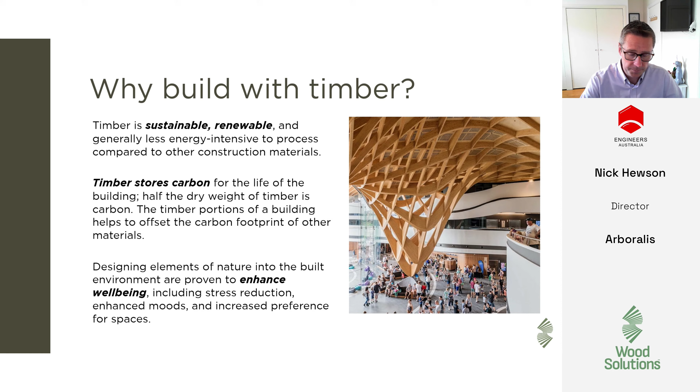So, what is MMC? I'm going to have to get through some definitions now, but the aim for the presentation today is to understand MMC and some of the broader typologies, how they apply to timber, get to know some of the key products and suppliers, understand where to find more info and how you as engineers can engage with it, and where to look if you want to integrate MMC into your projects.

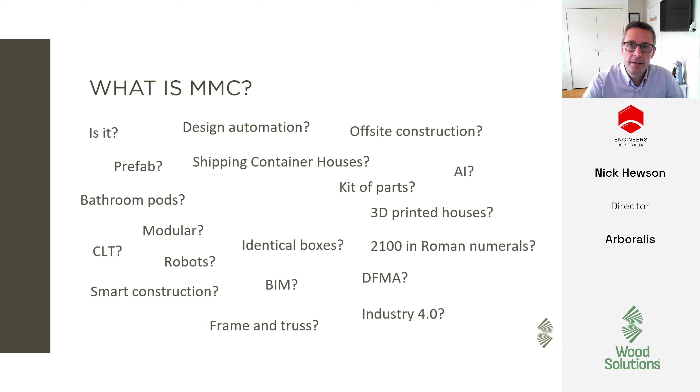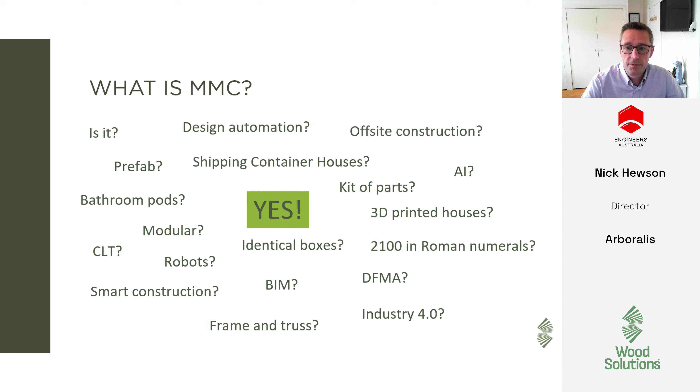So what is MMC? It's one of these terms that's unfortunately kind of both very vague at the same time as being—that's a kind of strength of it, I suppose, as well as a weakness. A lot of people use it to cover anything prefabricated and offsite—volumetric, shipping containers, all these things. But basically, MMC stands for Modern Methods of Construction. It's a bit of an umbrella term for a whole raft of different techniques of building, generally relating to a shift from doing more on site to factory controlled conditions.

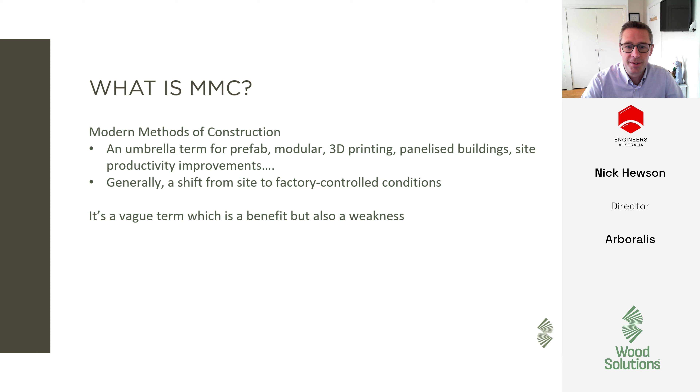So it sounds good. Politicians love to talk about MMC because it sounds like it aligns with their values and what they're trying to promote. It is a very broad term, but fundamentally I think it's about doing more with less—doing it faster, doing it with better quality, doing it with lower waste. It is very much a change in process and thinking.

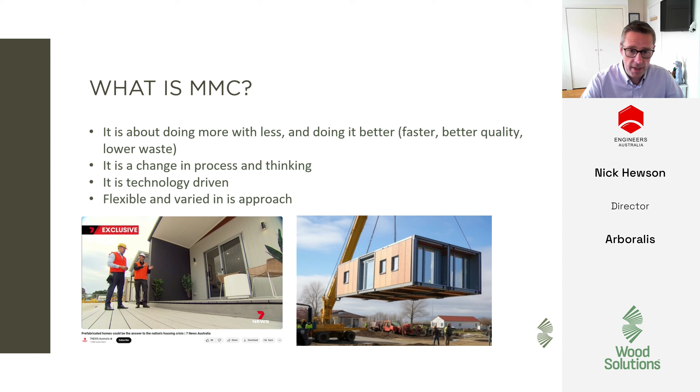This isn't a sort of business-as-usual approach to just building in a factory. It's heavily dependent on technology. There's a lot of pre-coordination that goes in now, particularly through your 3D models and through fabrication technologies in plants, and it's very variable. What it isn't—it doesn't just mean prefabrication.

If we were just to build things the way we do conventionally in a factory, it's going to result in some expensive buildings. So it's more than that—it's a process change, it's a thinking change. It's not going to suddenly solve the housing crisis and things tomorrow. It also doesn't stand still.

What's modern methods of construction today will be yesterday's construction tomorrow. So there's a constant need to keep evolving, keep iterating, keep building things better. It doesn't mean that we have to build every building like we do in a car plant with robots. It's about a kind of process as much as the machinery.

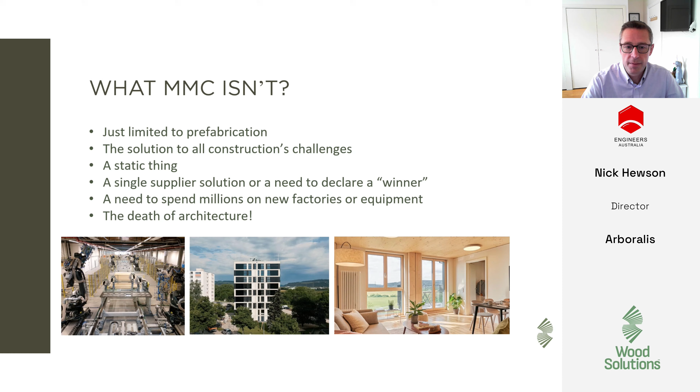So the machinery can be important. It can drive cost efficiencies and savings, but it isn't the end goal. The end goal is the building. How you get there and how you develop that, I think, is the really critical part to understand.

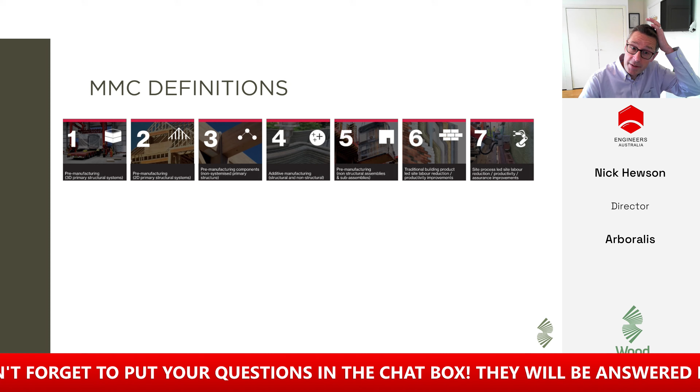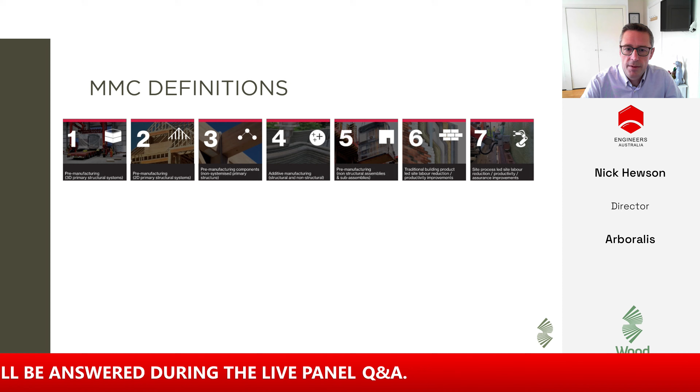So I wanted to take you through some definitions. This is what the UK government has provided. There's a really useful document out there—you can Google it, from the UK government, from a company called Cast Consultancy. They split MMC into 7 key disciplines.

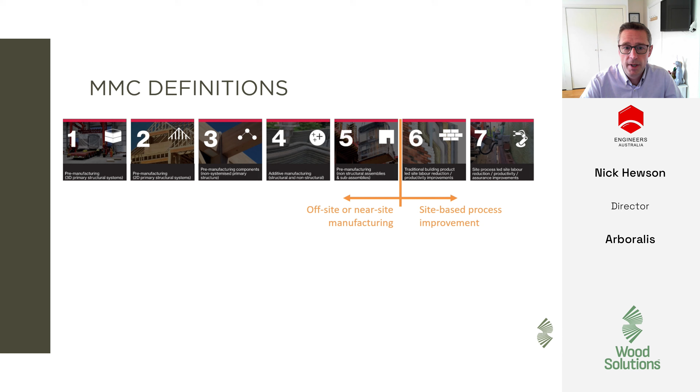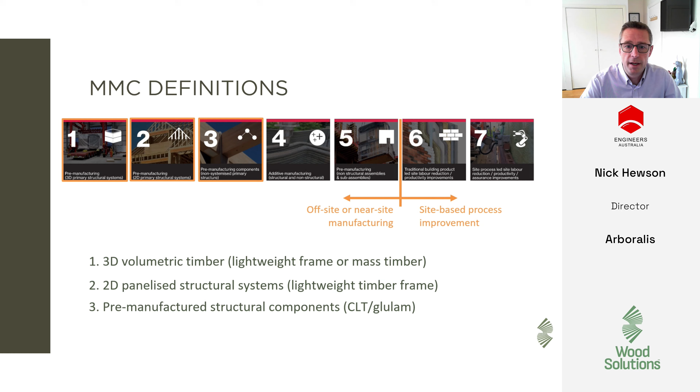Covering everything from off-site or near-site manufacturing to site-based improvement. They have 7 categories, but the most relevant ones to timber are number 1, which is what a lot of people think of when they talk of MMC—3D volumetric structures, so your fully finished units, shipping container type construction—panelized systems, and pre-manufactured structural assemblies.

I'm going to dig into each of these in a bit more detail now. As I said, remember these categories because we'll come back to them later. Category 1 is known as volumetric construction—you're transporting a full 3D unit of largely fully finished elements. So we're talking entire apartment units, all done in the factory, lifted to site, and put into position as a single unit.

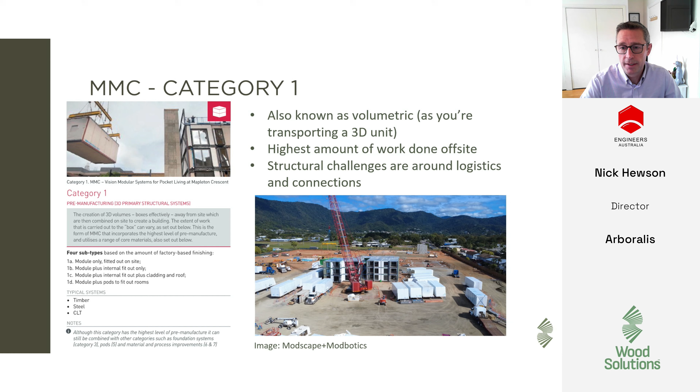So the most amount of off-site work is done in terms of finishes, fixtures, and fittings. Some of the biggest challenges are around logistics and connections. A lot of you will probably be familiar with things like bathroom pods, which fit into this category. Although there are no timber ones yet, I know one company is looking to develop those, so maybe we'll see those soon—but they're traditionally steel frame and GRC based. They can be integrated into larger timber modules though.

This is an image from Modscape and Modbotics, who you'll see referenced quite a lot in this presentation. They're really the premier volumetric timber manufacturer in the country.

So pros of this approach: you take a lot of work off-site, very, very fast to install. If you're really looking for something that needs to get installed quickly, then this is a very strong option.

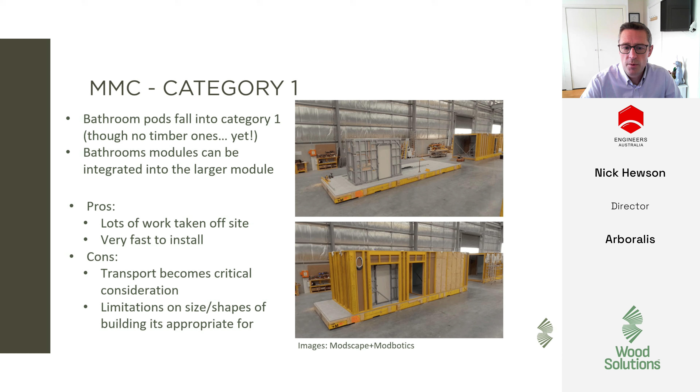Some of the disadvantages are the transport and logistics start to become very critical, and you are kind of limited on the size and shapes of buildings that this is appropriate for.

Moving on to what they term category 2, which is pre-manufactured 2D elements. So this is what we call panelized or kit of parts construction. For timber, there are different degrees of complexity with this.

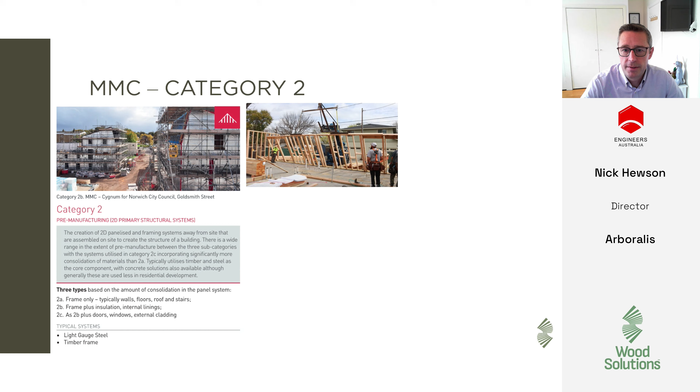You can start with everything from an open pre-nailed wall frame, which we use to build vast numbers of houses all around the country. And then you can start to add further components to that. It could be windows, could be linings to one side. It could be starting to put insulation and things inside, up to fully completed frames which are clad both sides, have doors, windows, electrical conduits and things installed.

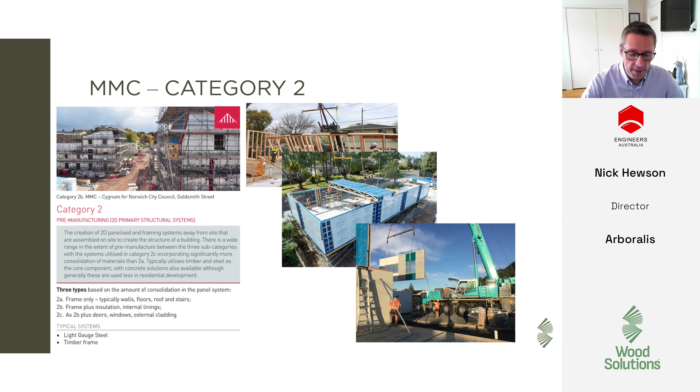So there's a great array of sophistication across what's possible with this, and all these products and systems are available in Australia. As I said, the pre-made wall frames and roof trusses and floor trusses are all very common.

The 3 kind of main nail plate companies that we'll see a little bit more about later. But there are 250 frame and truss manufacturers around the country that can do this sort of thing day in, day out, and are very, very good.

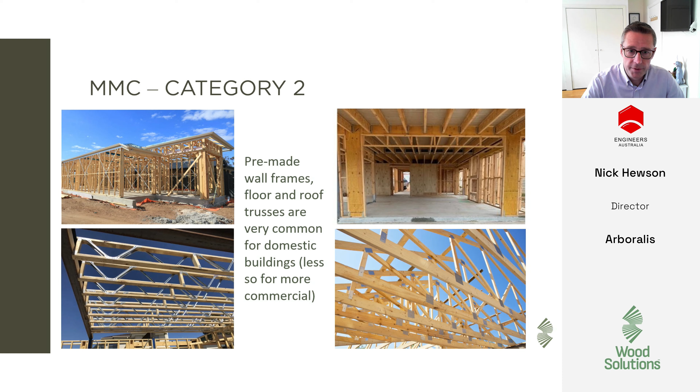So when we're talking modern methods of construction, we've been making these frames this way for 40 to 50 years and doing it very successfully. So there's a very strong supply chain out there already capable of doing this, and we can look to leverage them through higher levels of prefabrication.

So what we're starting to see now is a trend towards certain suppliers offering more than just open frames. They're starting to turn floor trusses into cassettes. They're starting to make prefabricated stairs, even lift shafts, and wall panels.

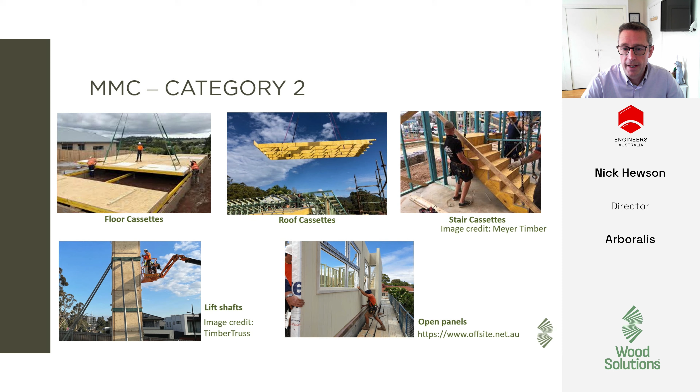We're taking more of that work off site, doing it in the factory where it's heavily controlled, where it can be carefully detailed and built, so you're not at risk of weather, you're not at risk of quality issues on site. This is certainly an opening area of the market that is really starting to develop.

Some of the advantages of category 2: it is very flexible. It can be applied to any building typology. We build a lot of timber frame houses in this country. We could be building more schools, more small apartments, buildings like that. It is very able to be prefabricated. Start again.

Some of the advantages of this category: it is a very flexible system. We can use different degrees of prefabrication from open frames through to fully closed walls, so that can be chosen to suit the project. It can be very cost effective. We are using the timber very effectively in a timber frame wall, for example. There's no real structure in there that doesn't need to be in there, so it is a very efficient form.

Some of the disadvantages are that the suppliers tend to be a little bit on the smaller side and more independent. There are 250 odd frame and truss suppliers around the country, from small up to very large, but it can be hard to find the right one for the scale sometimes in the area where you are, and I'll show you more information on where to find that later.

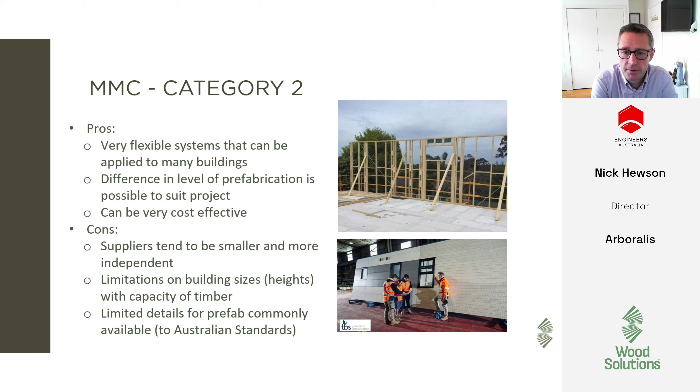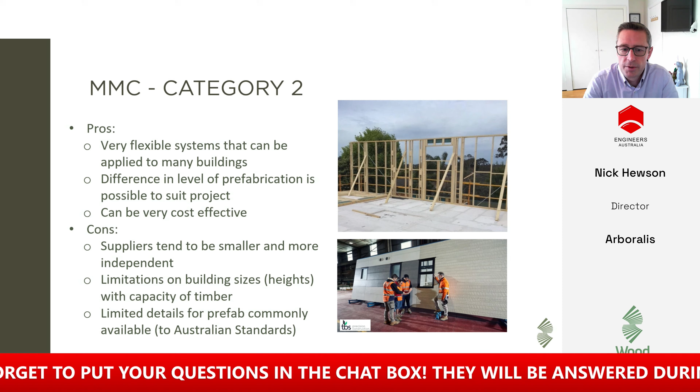We do have limits on building height and sizes that you can achieve with timber, just due to the pure capacity. But certainly, anything up to 4 or 5 stories for apartments should be very feasible in timber frame. And when you get into heavier areas of prefab, more finishes and things go on, so it is more challenging to find details and connections that will work for those, and that's where you need to work closely with suppliers, which we'll talk to later.

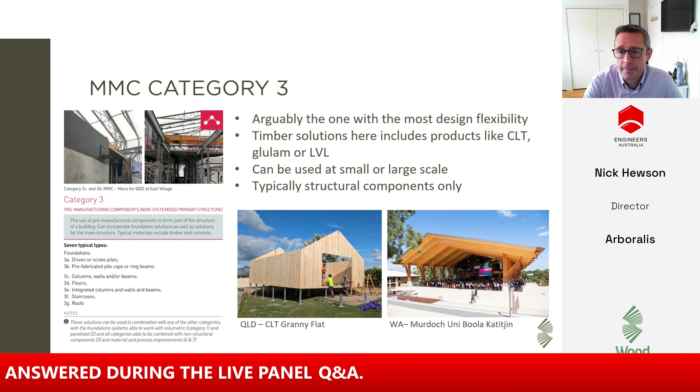Move on to category 3. This is arguably the one with the most design flexibility. For those of you who aren't aware, these are the 3 kind of main types of structural mass timber.

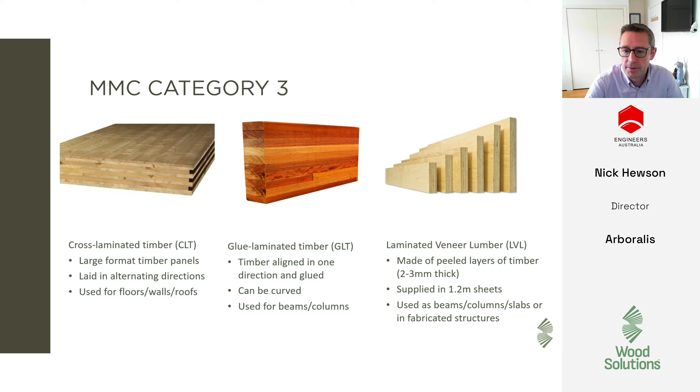Cross-laminated timber, which is your walls and floors, planks laid in alternating 90-degree layers. Glue laminated timber, where we lay the sticks of timber along the length, used for beams and columns. And then laminated veneer lumber, or LVL, which is a peeled product, can be used for a variety of things, from beams, columns, or slabs. So all of those sort of make up the mass timber family.

But this category, as I said, can be very variable. We can use it to build office buildings, with glue lam posts and beams and CLT slabs. We use it for multi-residential buildings.

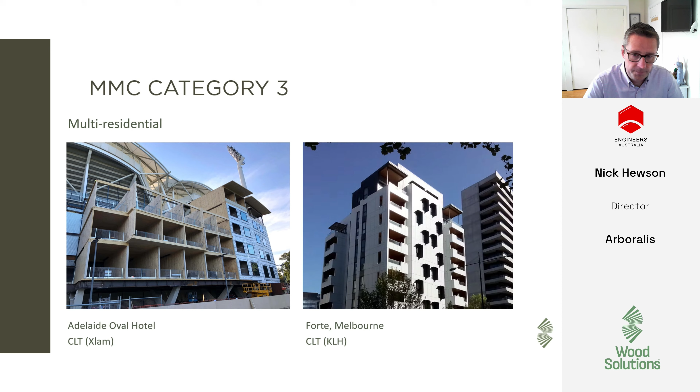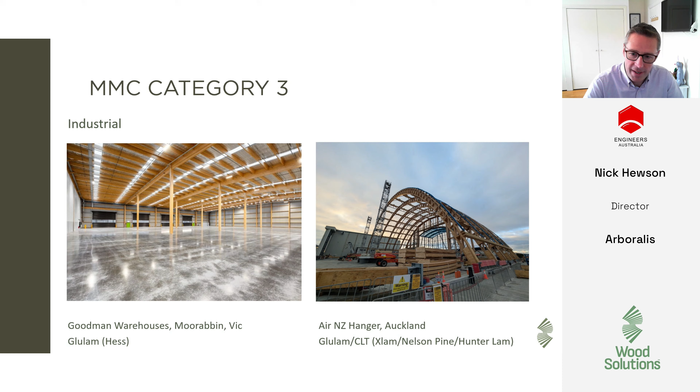We can use it for industrial buildings. The other one on the bottom right isn't technically in Australia, but it is a really cool one. It's a 100-meter spanning glulam, LVL, and CLT arch in Auckland. If anyone wants to look at that one, it's called the Air New Zealand Hangar, a really fascinating project.

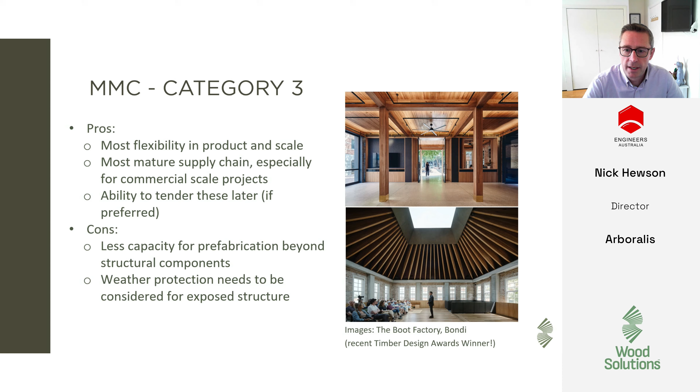Some of the pros of this: a lot of flexibility in products and scales, the largest and most mature supply chain, especially for commercial scale projects, and probably the most alignment in terms of different products. Materials are similar enough that you can potentially tender these later in the process if needed. Some disadvantages: less capacity for prefab beyond the structural components, and you need to be careful around weather protection, particularly for larger structures.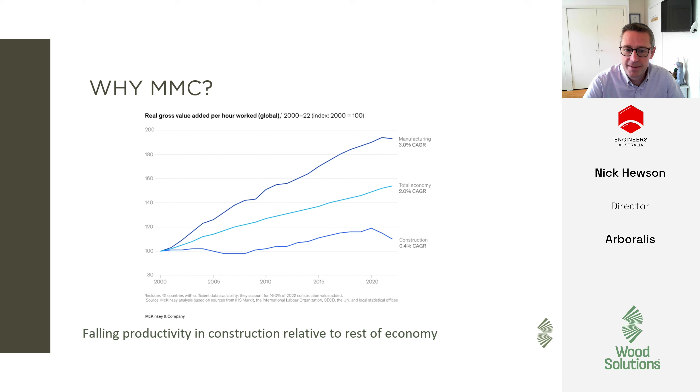When we look at construction relative to other industries, there's been a significant drop, or it's barely changed in productivity over the previous decades compared to other industries. A lot of that, I think, is because we still insist on building prototype buildings which are never repeated, with details that are never repeated, and we seem determined to design these from scratch every time. So I think we see MMC as an opportunity to find some efficiency in construction.

Another aspect is that we're also losing trades. We don't have enough trades to do the sort of buildings we want to do at the moment. If anyone's read a newspaper in the last few years, you'll know there are shortfalls in a lot of different on-site trades. But we see MMC as a possibility, a way of finding more secure employment, nicer working conditions, and taking that work away from building sites to put it in factories.

I'm going to shoot through this quickly. I left this QR code up on the screen - I've created my own little Google map where I've tried to map some of the major players in the timber MMC space around the country. Feel free to take a look, and if you've got any feedback or companies I'm missing, please let me know. I don't think I've picked them all up by any means.

We're starting to see these companies grow up, offering different services across the country. I'm going to flick through some of these now. I asked a lot of the suppliers I could think of to send me a quick slide showing what they do and some of the services they offer.

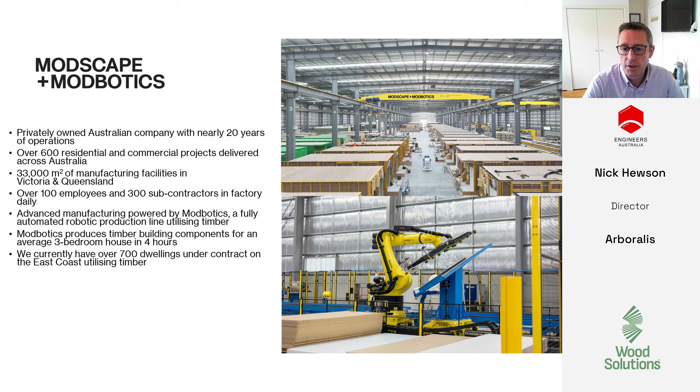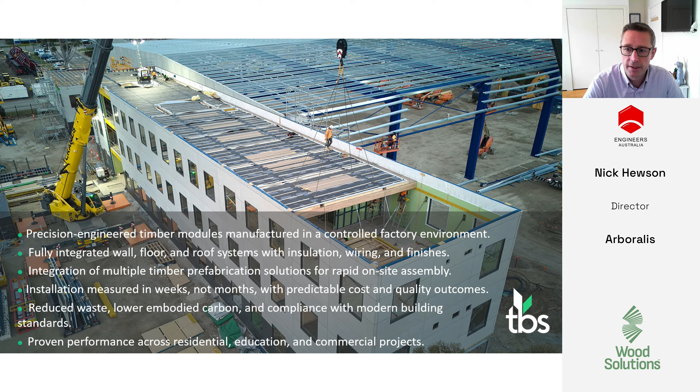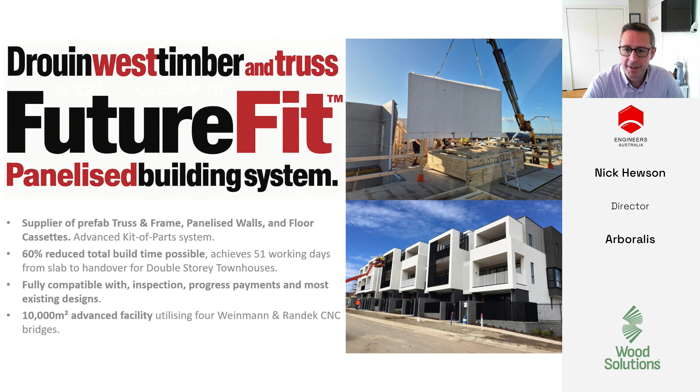Drouin West FutureFit is another panelized building system, again in Victoria. I don't know why all these seem to be in Victoria, but a lot of them are certainly based here, doing a lot of townhouses, again with pre-clad walls.

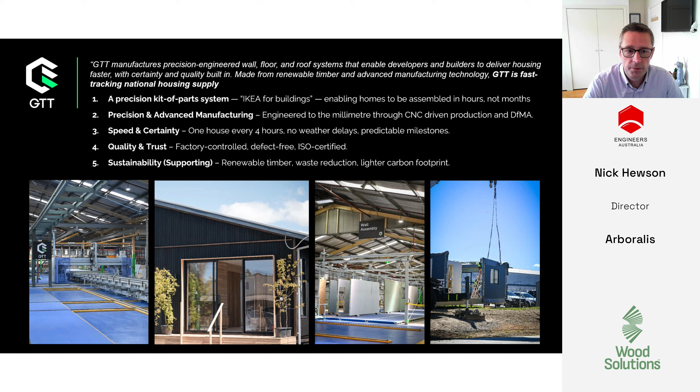GTT, or Green Timber Technology, based up in Orange. I've been working closely with these guys the last couple of years, who are just up and running now and starting to deliver their first projects. Sort of panelized walls, floors, roofs, all built out of timber frame on a fully automated line.

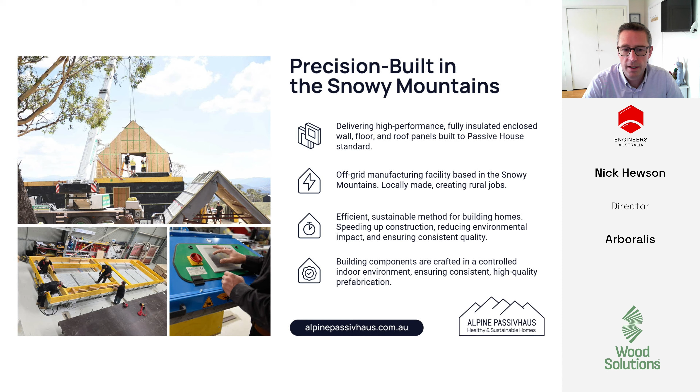There's a lot of these sort of guys around. I met these guys last week at a conference, and they asked me to include them in here. A lot of kind of passive house, smaller timber frame providers servicing that niche market here, again with high levels of prefabrication quality.

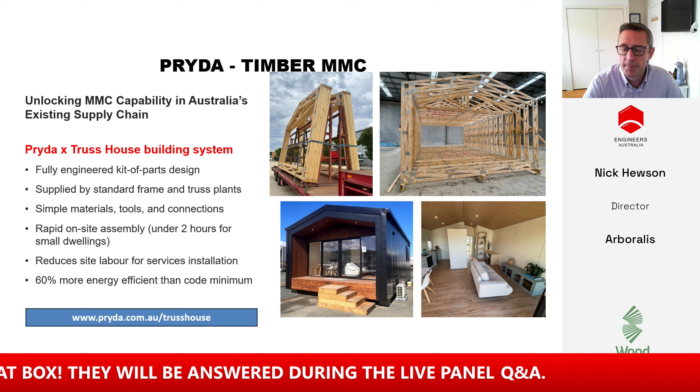Pryda, who are probably known to many of you who work in the domestic space, have a lot of innovation coming in. There's this truss house system, new to the market here, utilizing that frame and truss manufacturer, but making full buildings out of it, from walls to floors, creating portal structures, which is opening up possibilities for new building typologies that timber currently struggles with. So there's some really exciting innovation coming out of those companies.

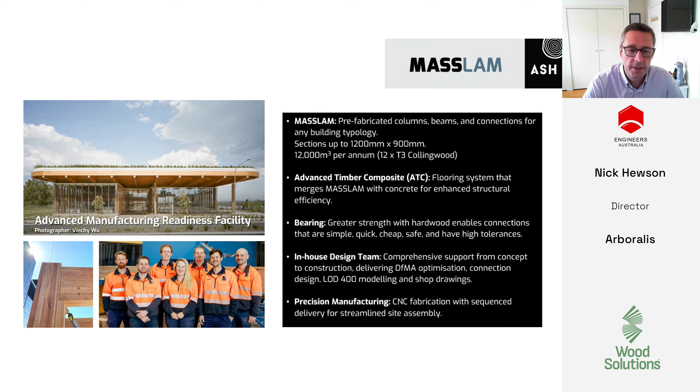Getting on to the mass timber guys, Masslam, who are based in East Gippsland, are arguably the country's premier mass timber provider in terms of glulam, at least. They produce some beautiful material and have worked on a number of large scale projects across the country.

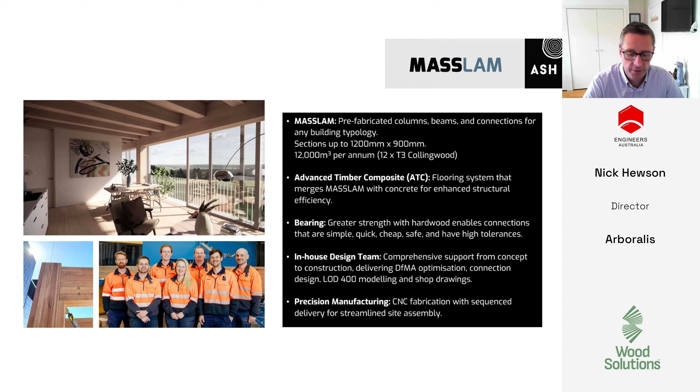Next, Timberlink, who have opened up in Mount Gambier, providing CLT and glulam, and are starting to deliver projects into the Australian market in the last 12 months.

Xlam, one of my old employers, the first CLT producer in Australia. They offer design and supply of a range of CLT and glulam products, and have done over 1,000 projects, so a lot of you will be very familiar with them. A very capable company, and they're starting to develop ranges of more commodity products aimed at that smaller scale domestic market, which is really exciting to see.

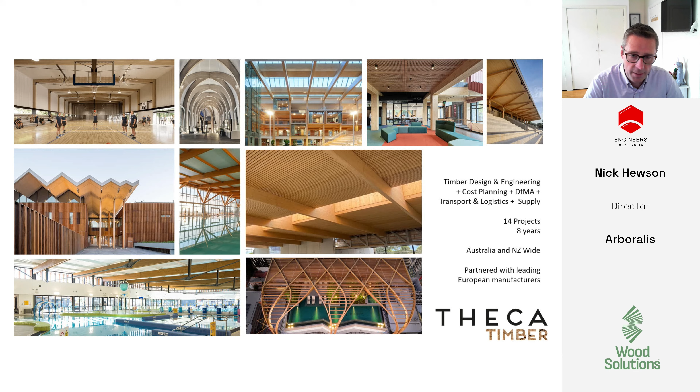THECA Timber, another one that's got a track record across the country of glulam projects. KLH, one of the Austrian pioneers of CLT, who have a subsidiary based in Canberra, and they're delivering commercial projects, schools, passive houses, things like that. They have a degree of prefabrication that they can do in their factory in Canberra.

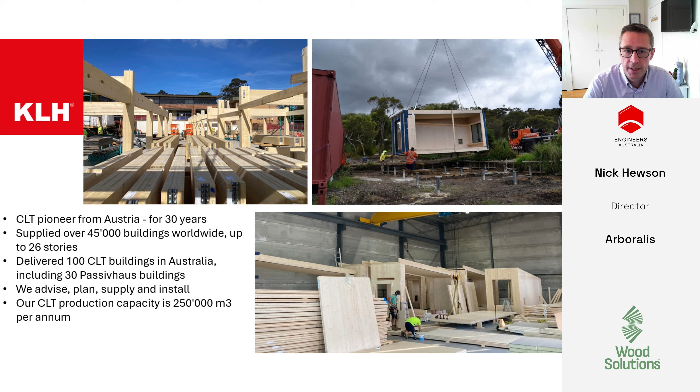Some of the overseas ones, so Techlam over in New Zealand, again producing some incredible materials and a high degree of automation in their factory. And there are so many others that I either haven't got slides for, or that I just can't spend the rest of the discussion going through all of them. But there are so many out there that offer different services, and I welcome you to reach out to those people and look at that map that I gave earlier. If you want to get in touch with any of them, they're only more than happy to talk about their services.

Just wanted to run through a few of these, the three different categories of MMC. You'll notice that all these are accommodation buildings, all kind of multi-residential buildings. And that's on purpose, because I want to show how these different categories can fit into that, because I think that's a really key market for timber and MMC.

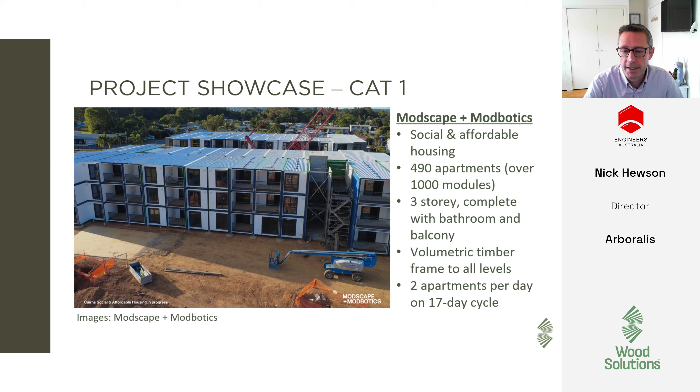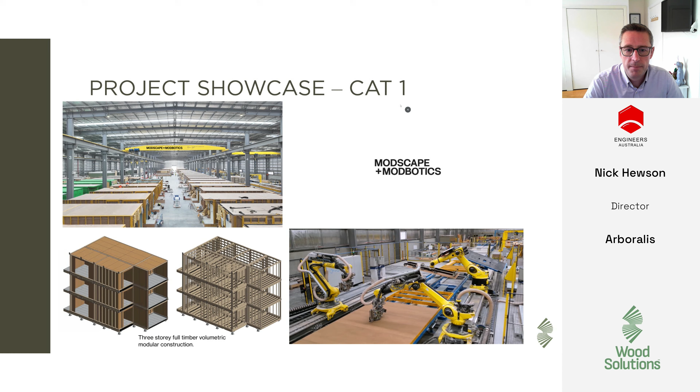Modscape and Modbotics are doing some incredible things with timber. This is an apartment project they're doing in Cairns - 490 apartments here across a whole number of buildings, up to 3 stories, supplied complete to site with bathrooms, balconies, everything installed. They're producing 2 of these apartments every day using their automated robot line to create the walls, then turning those into volumetric modules complete with bathrooms and fixtures and fittings installed.

Timber building systems in that sort of Cat 2 panelized system. They've been doing a whole raft of projects for Henley Homes, prefabricating townhouses with prefab floors, walls, and roofs. Again, very, very fast, very quick, simple to install. They've done hundreds of these now, and brought some real innovation in.

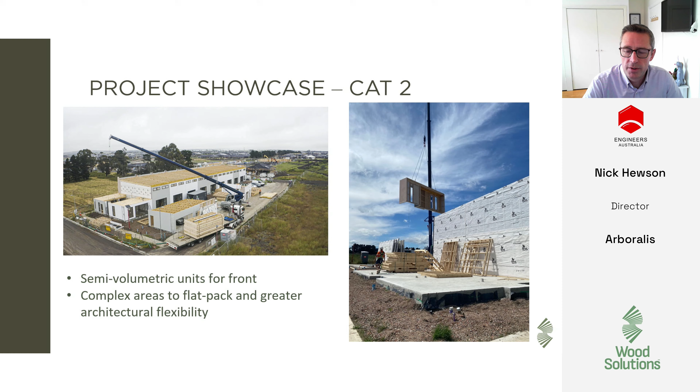They've got a semi volumetric unit for the front of the building, which gives you some flexibility to vary facades and to deal with some of those complicated areas that are difficult to flat pack in a more traditional sense. By expanding those fronts into a meter wide strip, they can deal with a lot of the complexity that comes with those areas and do that in the factory. This has been a really successful project.

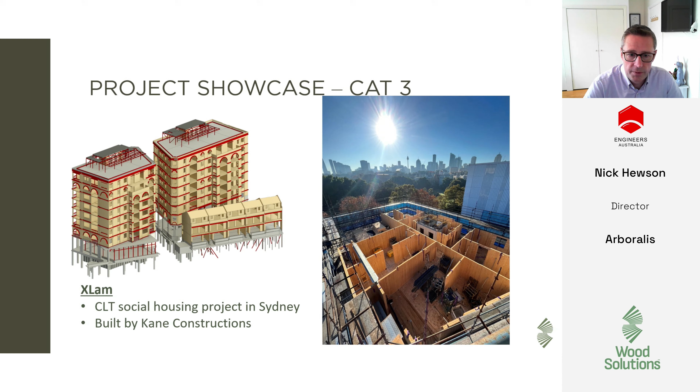Getting a bit taller in scale, once we get over 4 to 5 stories, we start to have to move from traditional lightweight timber frame into more mass timber. This is a project that Xlam have done recently in Sydney, built by Kane Constructions - social and affordable housing built using load-bearing CLT.

Ultimately, it's all clad in brick, which seems a little bit counterintuitive to me, but that's the market in the area. It even had a visit from the King earlier in the year. So this one was a pretty high-profile project done recently.

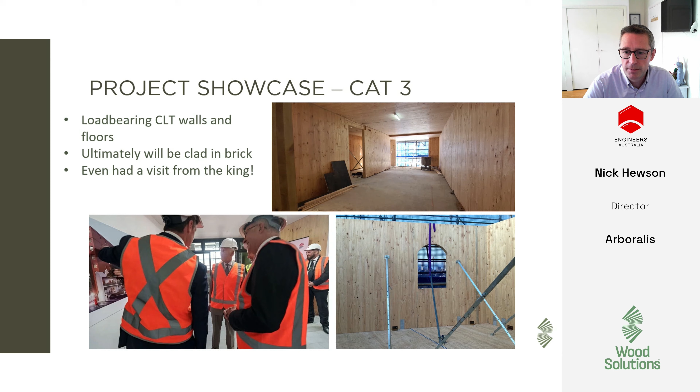So all those three examples show different ways that you can achieve apartment buildings and multi-residential in timber frame using different systems.

So I've given you an idea now of the different systems involved. So what does it mean for engineers? How do you engage with the process? Why choose it in the first place?

For me, why you'd want to choose timber in an MMC solution is the reduced embodied carbon of the timber - a lot of clients are certainly asking for that approach these days - and the speed of construction on site, being able to get these buildings up, get tenants in, get return on them, reduce holding costs.

That's obviously really critical. Where you have limited labour on site to build more conventionally, again, it's massive. The aesthetics, that biophilic nature is also really important for timber buildings, as well as the fact it's just very lightweight, so you can make savings in foundations and transfers and supporting structure.

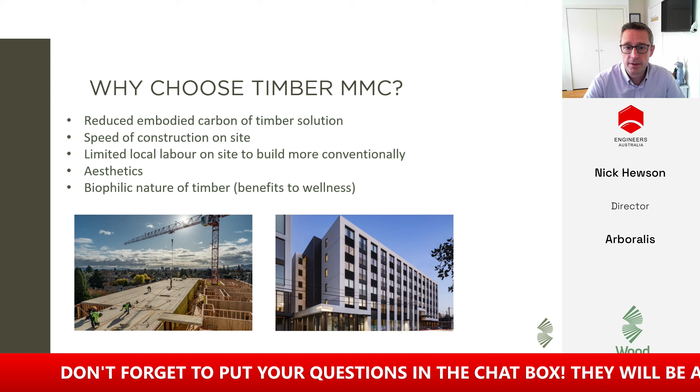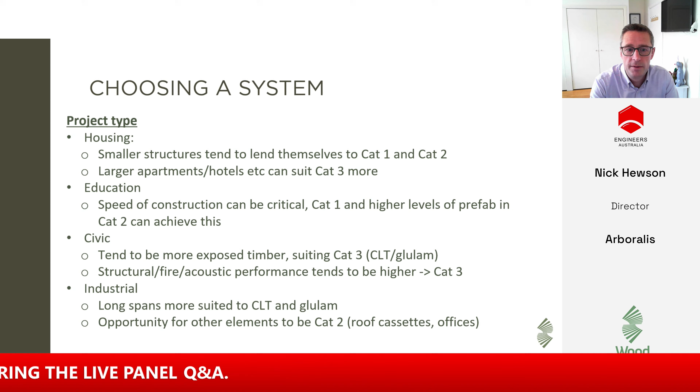So if you're advising a client at the start, if they're interested or you'd want to kind of promote a timber, an MMC response to it, some of the questions you want to ask yourself: what type of project is it?

If it's a smaller structure for housing, it tends to lend itself more to the volumetric or panelized systems. Once you get above a certain height, my gut feel is usually about 5 stories, the mass timber options start to become much more cost effective and essential just to deal with the load.

If you're looking at school buildings or university buildings, that speed of construction can be really critical. If you're building new classrooms, getting those units on site fast in holidays, reducing disruption to students can be really important. Those volumetric and panelized systems can really help to achieve that and speed things up.

Civic buildings, the larger government ones, tend to be a lot more exposed timber - they want to celebrate things a bit more. So I'm seeing those more in the CLT and glulam area, with more structural, fire and acoustic performance requirements. It tends to be that the larger, more solid sections of timber are more suitable there.

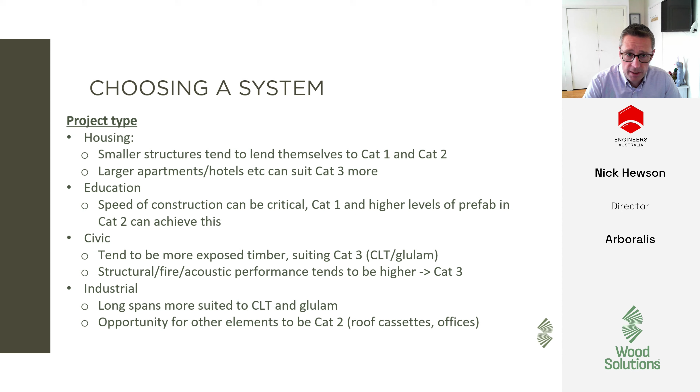Other buildings like industrial, long span, tend to be suited to more CLT and glulam, but there certainly is opportunity for other systems, particularly panelized elements for roofs, walls or offices, to be integrated as well. Not to say any of these are hard and fast rules, but just more questions to ask yourself at the start.

Obviously the project location is really critical - local labour, what trades are there beyond structure, carpentry, how is it installed? Transport - where are the factories relative to the site? As you can imagine, transporting fully volumetric modules, you're paying to ship a lot of air.

So those sorts of projects can tend to have a large component of their cost be understanding that when you're working out which options to use.

Also that site access element - those volumetric modules can get pretty heavy, so if you need a large crane, is the site going to support that? Can you get the units there? That can be a really critical one as well.

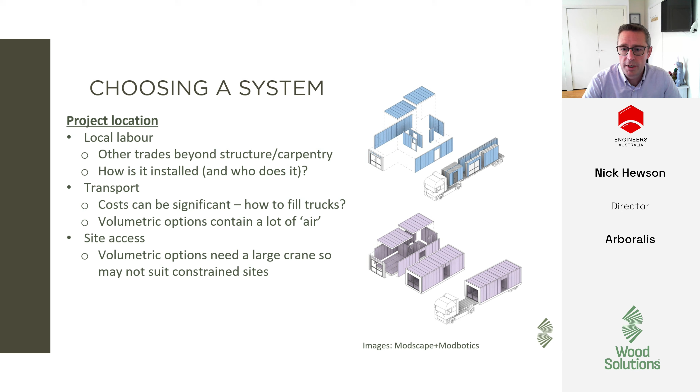So sometimes using smaller components to fit into more dense urban infill sites can be an important way to go. One thing I see a lot of is we need to understand those manufacturing constraints - what sizes are available, whether that's CLT, glulam, or timber frame.

If you're designing things that sit outside that, you can get inefficient very quickly. I've put some specific ones up there - every manufacturer is slightly different, but there are some common themes. Wall frames are typically 8 to 10 meters, up to about 3 to 3.2 meters high. That tends to be the sweet spot.

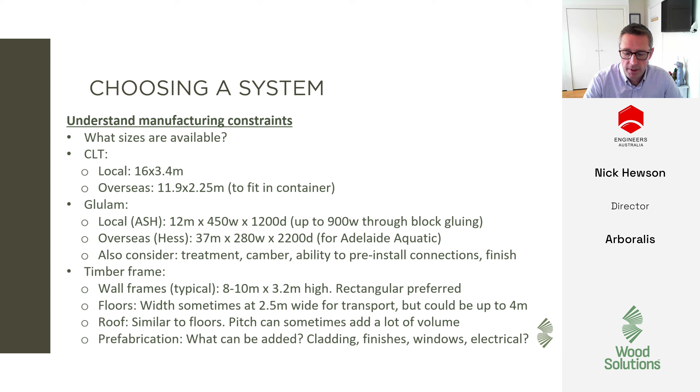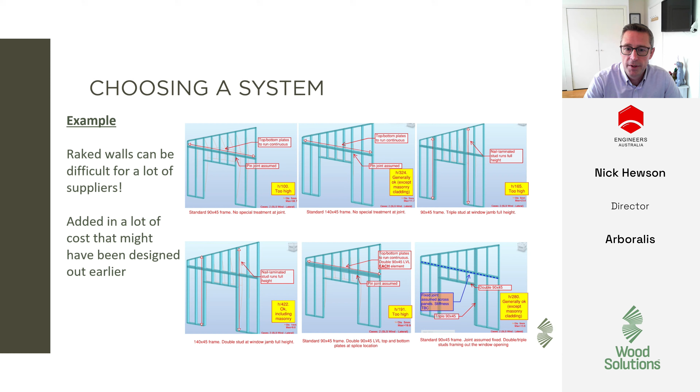If I show an example, it's actually quite hard to make a raked wall. If you're doing that on an automated line, they're generally built to do something in a rectangle. This was an example for a client where they were using a prefab system, but they had a raked ceiling and a wall panel that got very tall. So we were trying to work out how to make that automated. It added a lot of cost in the end - there's extra structure, extra wind beams and things that need to be integrated. That could have been designed out a lot earlier and saved a lot of cost if the building had been tuned around the particular constraints of those systems.

So turning your project into a timber-based system, I think some of the key things for structure - making sure things are aligned. Timber doesn't deal very well with transfers, so if you're constantly stepping around wall lines or structural lines, that's going to add cost and become not very cost effective quickly. Buildings need a lot of alignment between levels - it's not to say you can't have a podium structure built more conventionally with timber above, but doing a lot of transfers is challenging.

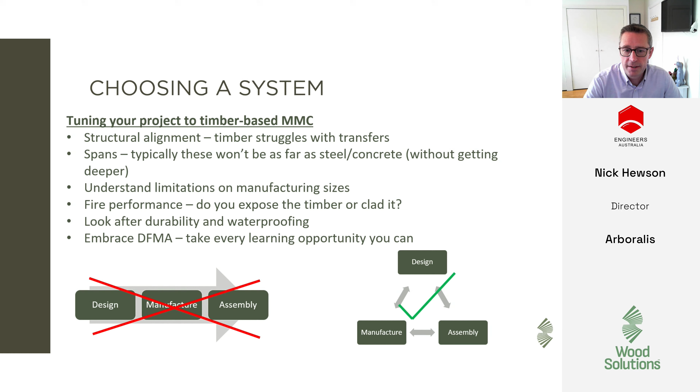Structural spans are obviously a little less than they will be with steel or concrete. Understanding those limitations on the manufacturing size. Fire performance, particularly as you get into larger commercial buildings - do you expose the timber, do you have to clad it? Something I'm really passionate about is DFMA, Design for Manufacture and Assembly - taking every opportunity to learn that you can, getting out to manufacturers, getting out to sites, speaking to people, and trying to turn it from a linear process into one where everyone's comfortable feeding things back to each other and learning.

When we're talking about structural design, I think we need to focus on sizing of the elements, picking the lowest common denominator for the materials - important. It's no sense designing for a really high grade glulam if only one supplier in the country can offer that. Particularly at that early stage, it's often better to pick the lowest one and make sure the design suits that, so you get the most market coverage. Don't forget the fire design, which can often govern member design and connections - so make sure you've got enough timber fiber in for that.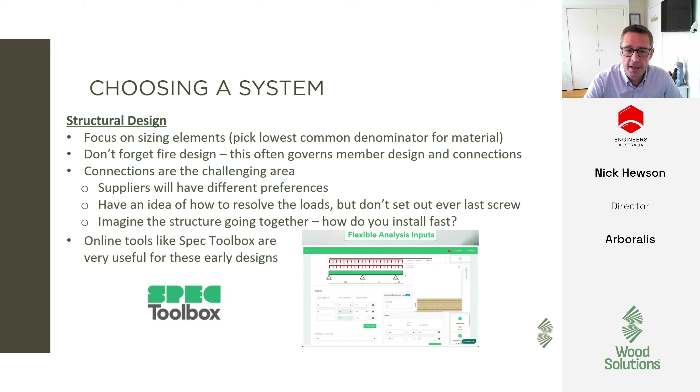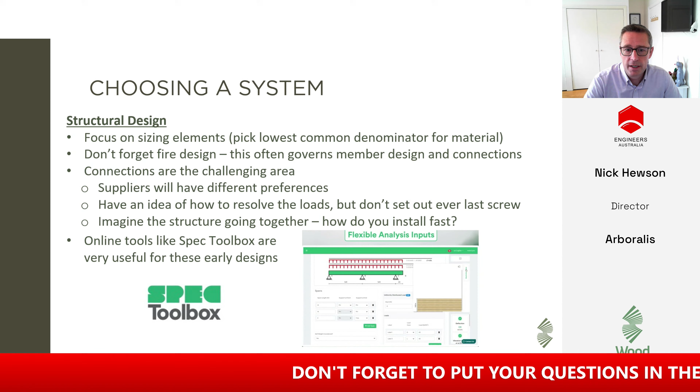The connections are the most challenging area. Every supplier has a different way of doing things, so you need to have an idea of how the thing goes together and some ideas of connections. Imagine how it goes together - how are you going to do this quickly? You don't want to design every last screw, because the supplier is going to have their own input into that - they're going to want to control that element. So make sure you're aware of what the supplier does, what their offerings are.

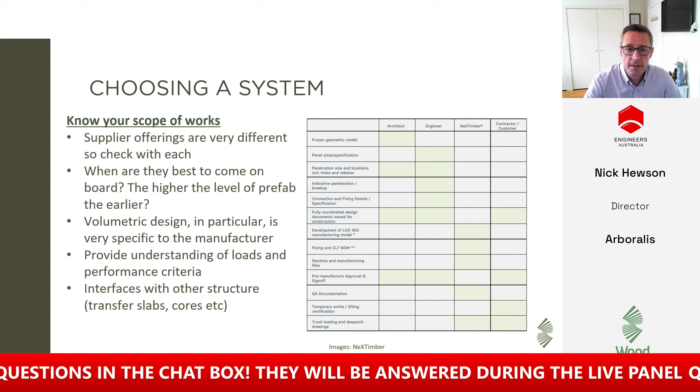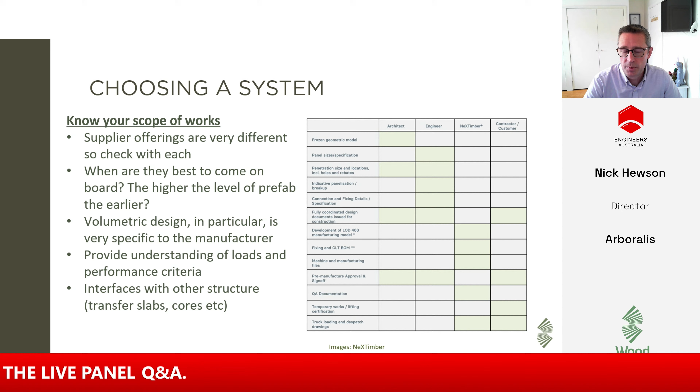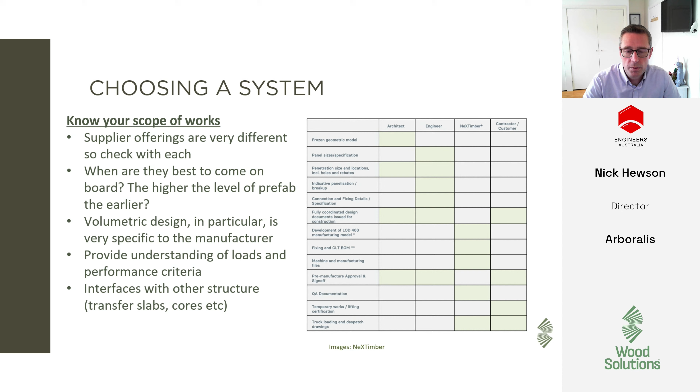There are different ways of doing things, and some suppliers will offer all sorts of engineering support and detailing, and others just want to supply the product. So it's important to understand that earlier when you're choosing - when they come on board is often important. The higher the level of prefabrication that you're dealing with, beyond the structure - if you're dealing with all the facade elements, glazing, putting a lot of finishes on, then you probably want the supplier on board earlier. Volumetric in particular, they will do a lot of that stuff themselves in-house. So as the engineer, you're trying to understand the interfaces with other structure, whether that's transfer slabs, cores, and provide them with the loads and performance criteria to be able to do what they do.

Understanding what you need to document, and conversely what not to document, is one of the biggest challenges in this area - knowing how far to take your design. Do you design it to the nth degree and risk having a lot of that undone later when a supplier comes on board and needs to change it to suit their system? But you also can't keep it so generic that they're unable to price it or detail it. So understanding where you pitch that level of design, documentation and resolution is really important.

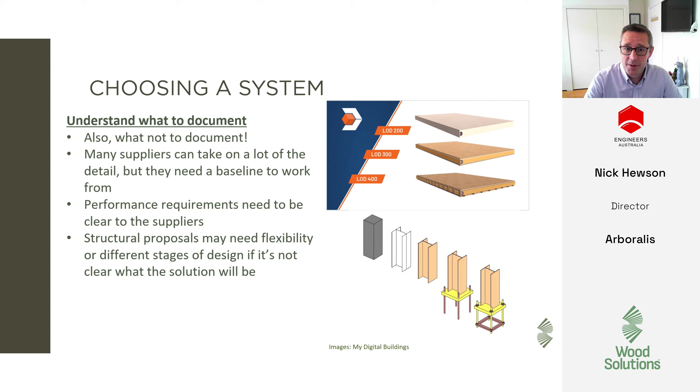Making sure those performance requirements are clear to the suppliers gives them the ability to look at different ways of doing things and connecting things. That's probably going to need some flexibility in your proposals if you're not sure what sort of solution you'll end up with - flexibility to deal with the different ways of doing it and delivering it. You don't want to do too much and don't want to do too little. It's that kind of Goldilocks effect.

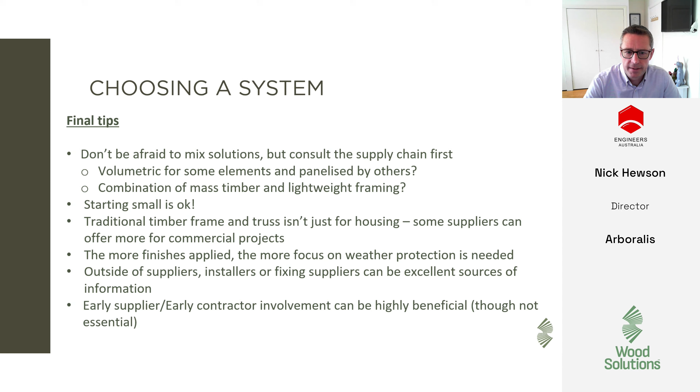Just starting to summarize, and I realize I've gone nearly the entire way through the presentation without addressing the elephant in the room: is it any cheaper? It's a cop-out answer, but it depends. If you're looking at bespoke one-off designs for MMC, it's probably not cheaper. That doesn't mean you don't need to do them - there may be other benefits with speed of construction, reduced disruption, or quality. But if we're designing these one-off buildings, it's unlikely to generate lots of savings.

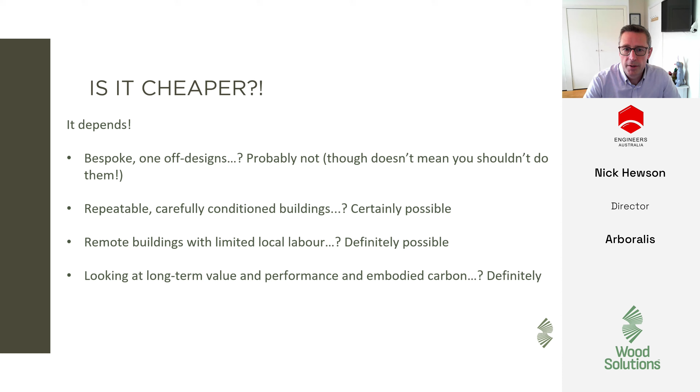The more repeatable projects are, the more carefully conditioned, the more we pay attention to those manufacturing constraints up front and design around those - designing it so that it could be timber, not that it has to be - that certainly starts to become more possible. As we go into more remote buildings with more limited local labour, I think this equation only starts to tip more and more in favour of MMC and timber. Clients looking at long-term value, embodied carbon, and the build-to-rent space are looking very heavily at these sorts of solutions at the moment, understanding that longer term view of things rather than just bottom line cost. So those sorts of projects are great candidates.

There are lots and lots of sources of information out there to help. Generalized timber support from the likes of Wood Solutions and Timber Queensland. There's your mass timber suppliers, the three major local ones, plus the overseas ones I've mentioned earlier. Looking at the lightweight open frame market, the three nail plate fixing manufacturers have a wealth of information and technical support available to the market. Then the prefab guys - again, a lot of very capable people operating in that space who are only too willing to talk to you about your projects. For fixings and brackets, the likes of Rothoblaas and Simpson Strong-Tie have really good information and systems connections. And volumetric timber suppliers are also capable of having a conversation. So there's lots of information out there - I encourage everyone to dip into those, particularly Wood Solutions as a first port of call that can help direct you in the right location.

Increasingly in the future, I think we're seeing more and more direction towards MMC. The ABCB has put out some papers and is doing a lot of work in that space. The Victorian government wants to make itself the townhouse and low-rise apartment capital of Australia. New South Wales has put on a couple of showcases of their MMC program recently. And as I mentioned earlier, there's an industry initiative to try to take timber frame into the low-rise market, expanding out of traditional housing construction into more commercial buildings. So there's a lot of incentive coming here - push from the market and pull from developers and government. It's a really exciting time to be here.

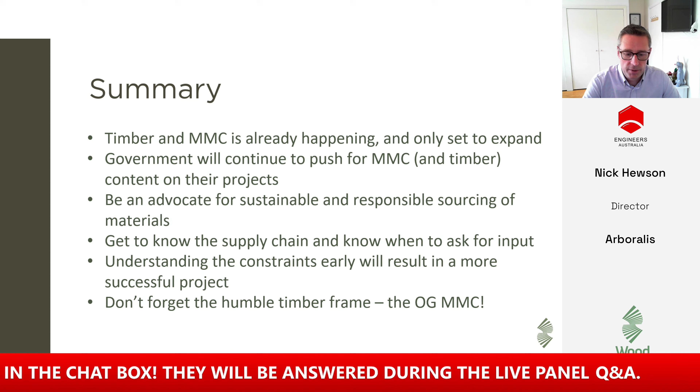So yeah, in summary, timber and MMC, it is already happening here. It's only going to expand and get more. So I encourage everyone to look at what's out there and see what the opportunities are. Government tends to be a real pusher in this sense, with a lot of incentive on government tenders coming out recently for MMC content and timber more generally. This is certainly an area they're trying to show leadership in. I'd encourage everyone here to be advocates for sustainable and responsible sourcing of material, making sure that you know the supply chain.

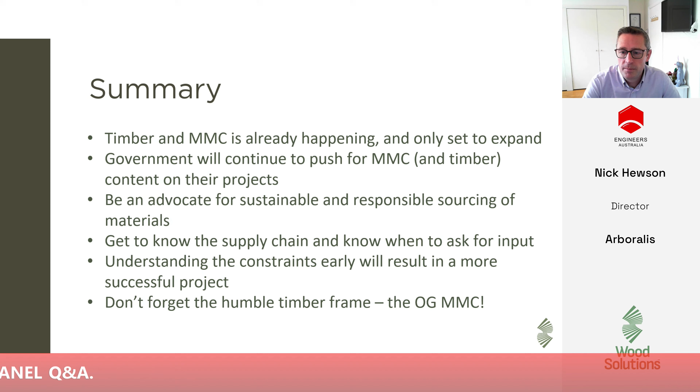When's the right time to get people on board? When's the right time to ask for input? Making sure that we're sourcing materials from sustainable forests and things like that, and that we understand those constraints early. Making sure we can design a building so that it could be timber, not so that it has to be, but at least we're sympathetic to some of those constraints, and give the opportunity for the market to tender on those.

And don't forget humble timber frame, which is the original MMC as far as I'm concerned. There's a lot more capability in there to use that sort of system for more projects than we are at the moment.

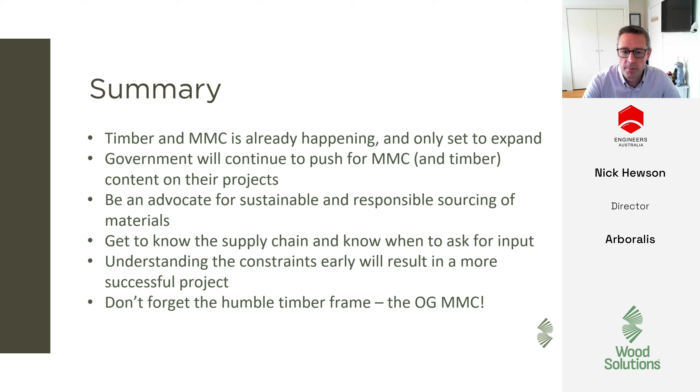Thank you, Nick, for a great presentation. It's now your turn to get involved, so please submit your questions in the chat box and let us know who your question is for. Thank you to everyone who submitted questions whilst registering, and we might start with a few of those. We had a great question come in from Damien. Good afternoon to you, Damien, asking you, Nick, how does the procurement of a non-commodity material fit into our competitive tendering environment? Thanks, Damien.